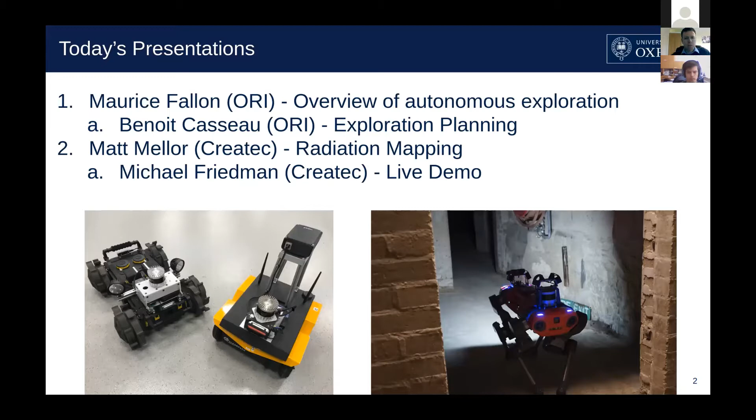So we've worked with multiple platforms in the project. Most of the work was done with a legged system on the right-hand side, the ANYmal, but we'll demonstrate with the Jackal in the center/left, the yellow robot. Okay, so first I'll talk about it from the context of autonomous exploration entirely without reference to nuclear radiation. And from my perspective, the state of the art is the DARPA Subterranean Challenge.

So this is a multi-year kind of robotic treasure hunt in which a variety of teams around the world are competing to develop autonomous exploration systems to allow teams of robots to start with no prior information and explore unknown facilities. So that's been tested in multiple different test locations. So an underground mine. This is a mothballed nuclear facility in Washington State in the US, where the most recent competition was held in February of last year, just before everything changed.

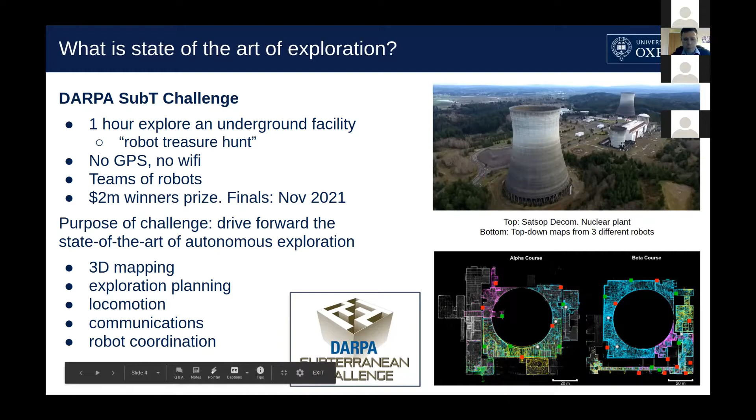And you can see in the bottom right some of the maps that were created by our team competing in the competition. Each color indicates a different robot that was exploring simultaneously over the course of 1 hour. The idea is that the robots start at this doorway here, teams of robots, and they have to build maps and report back different kinds of treasure that they detect. So mannequins or notable things like backpacks or mobile phones that might be detected through their Wi-Fi. And this is what the state of the art of mobile autonomous robots exploring in unknown environments looks like.

So the Spot robot here has been adapted by JPL, part of NASA, and we've been working with the ANYmal, and the characteristics of those and other platforms like wheeled platforms, which have been used by other teams, are having a variety of omnidirectional LiDAR and depth cameras around the robot. So you can see in both of the platforms here, there are a multitude of cameras and LiDARs that are creating 3D reconstructions all the way around the robot, supporting different types of odometry, so things like thermal cameras, because part of the challenge is in smoky environments.

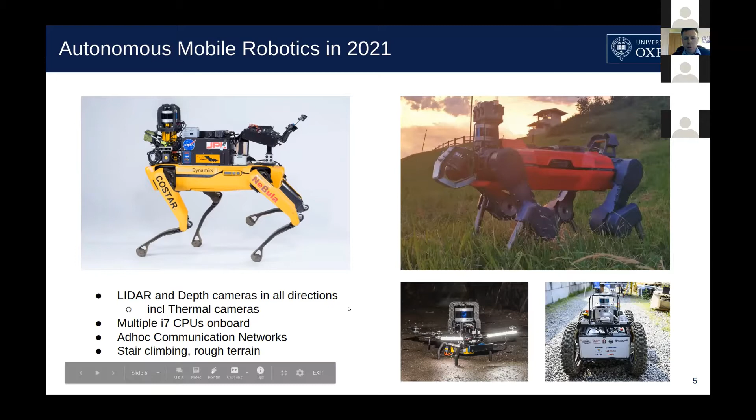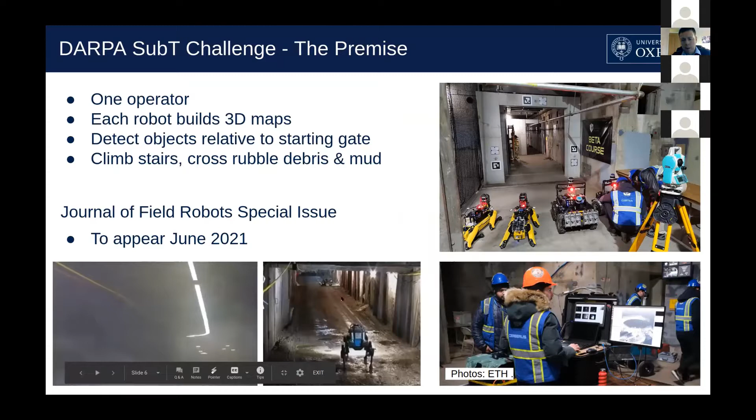And that's come about because, you know, with all of this extra kit that you can see on top of the robot, the Spot robot here, there are multiple i7 CPUs on board. So there's a lot of capability being pushed forward in this competition, and these are the scenarios that you can see. So smoky environments, muddy, dirty mines. Here in the front, you can see one of the robots from our team that went out first and fell over, and then the second one is following through. And it's all controlled by a single operator.

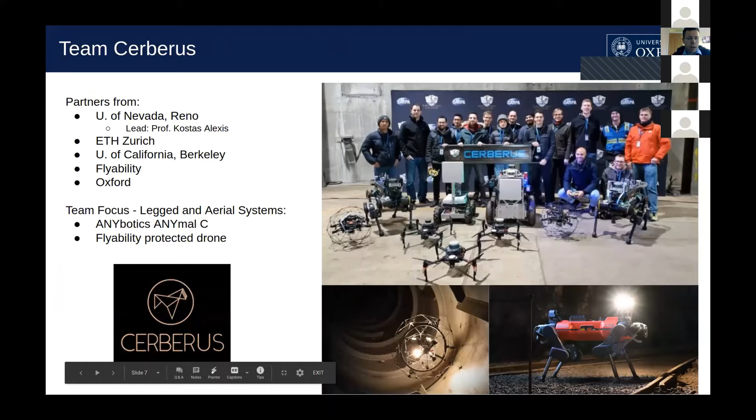Now, I won't go into great detail. This is the team that we're involved in, but we're focusing on a combination of aerial and legged systems. And some of the mobility aspects that are being pushed forward in here are obviously things like stair climbing, traversal of muddy ground, but also communications, which is a major aspect. The first time you go around a concrete wall, your communications drop out. So we're developing droppable wireless antennas so that we can extend communications into the facility so the operator can see what's going on and direct the robot.

Today I'll talk mostly about 3D mapping, which is the core technology to give the robot situational awareness and then to enable exploration planning.

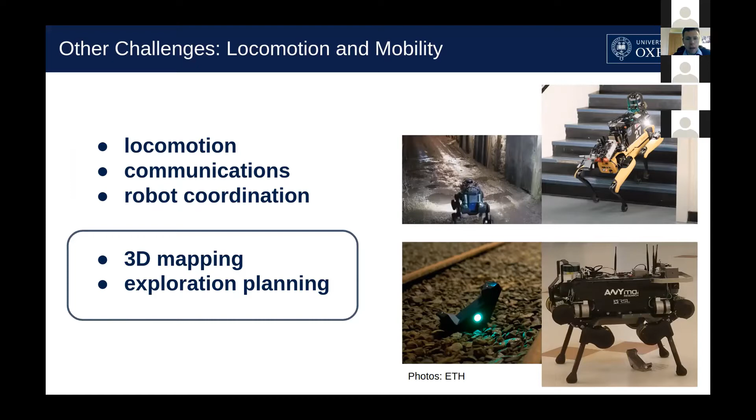As I mentioned, the robots have a variety of different odometry sources on board. So on top you can see here a series of fisheye cameras, so that they're able to give us a kind of visual odometry, laser obviously, and leg odometry. And the primary piece of work that we've done and contributed to this competition, but also developed and integrated for the project, the radiation project, has been fusing all of these different sources of odometry.

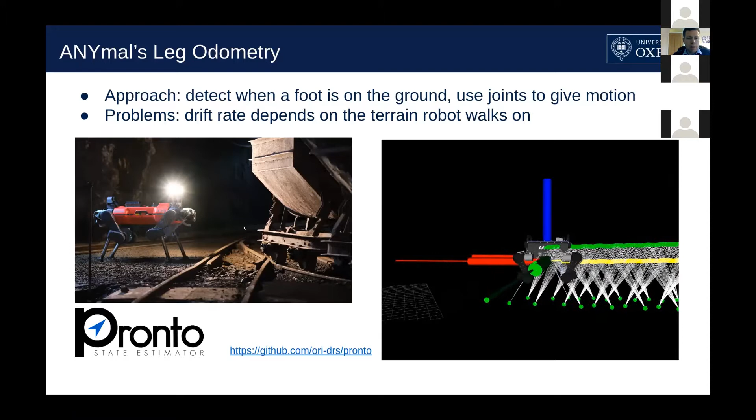And then we have the leg odometry from the walking robot. This on the right-hand side indicates the walking robot walking, and every time you see a new green dot, it corresponds to a foothold, and that gives us a constraint that allows us to estimate just based off of the onboard leg sensing. And with wheeled robots, you would have wheel odometry. This source of odometry continuously drifts, and really it depends on the type of terrain you're working on. So on the left-hand side, you can see some muddy ground in an old mine that we've used for testing.

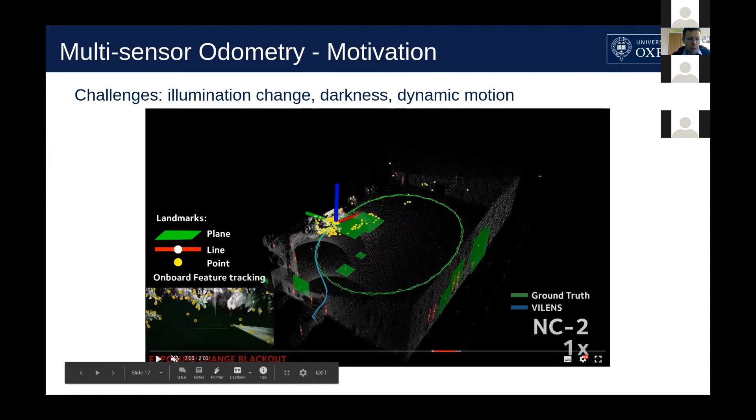So here you can see it's a very harsh visual lighting situation. We're pointing the camera directly towards the sun, and as we come underneath this bush, you can see that the exposure in the camera changes dramatically. The yellow dots, which are the visual features that are being tracked, drop out. You can see the cameras, oh, am I getting that right? The camera becomes completely overexposed.

All the yellow dots have dropped out now, but we naturally fall back to tracking the LiDAR planes and patches that you can see here. So here you see a green patch on one of the walls, and then you see some vertical edges which correspond to edges on window frames and door jambs, for example.

And that gives us robustness to a lot of dynamic motion if the video is coming through. And here you can see some sort of more aggressive motion. So this is our handheld system being aggressively shaken, and despite that, we're able to fuse all of the sensor measurements.

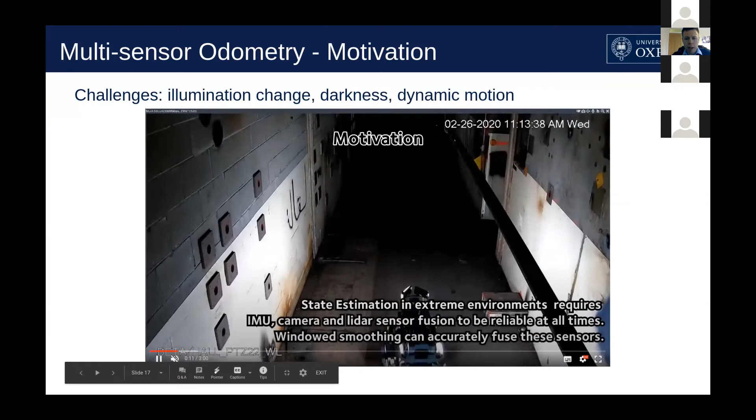And then taking it back to the application domain, this is the entirely unlit room where the only lighting is onboard lighting from the ANYmal robot, fusing together these different sources. And here you can see what that looks like. So the yellow dots, again, are the visual features that you can see both in the image and in 3D space.

The green patches correspond to flat patches. It's actually flat patches on the side of the cooling tower of the test location, and the red edges correspond to vertical structure that you see in the environment. And you can see the very consistent odometry that's being estimated.

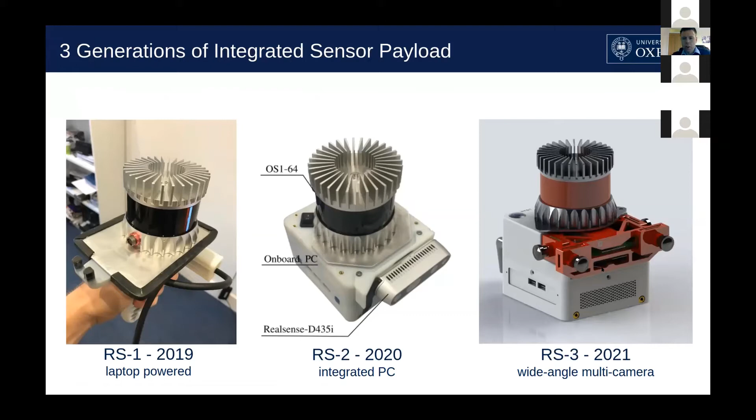So we've been developing this through 3 different iterations, making it more advanced as we've gone from something pretty crude on the left-hand side. We integrated a PC early in the year, and then we have this new model that we're putting together that has multiple wide-angle fisheye cameras, so that we can use more vision in some of the degenerate scenarios. And we've also worked on deploying it and integrating it within robots, which will be the focus for the remainder of the talk.

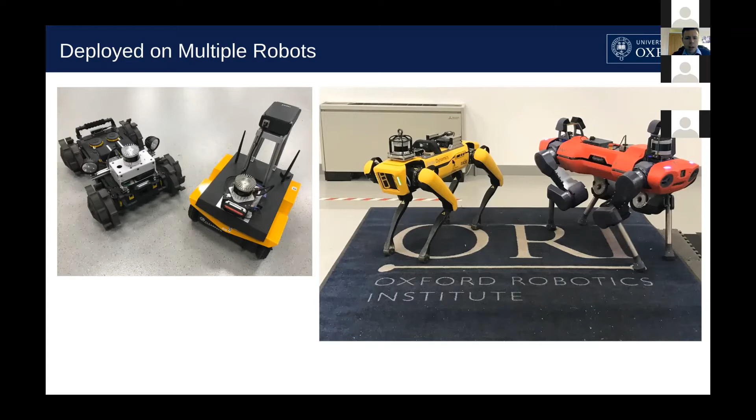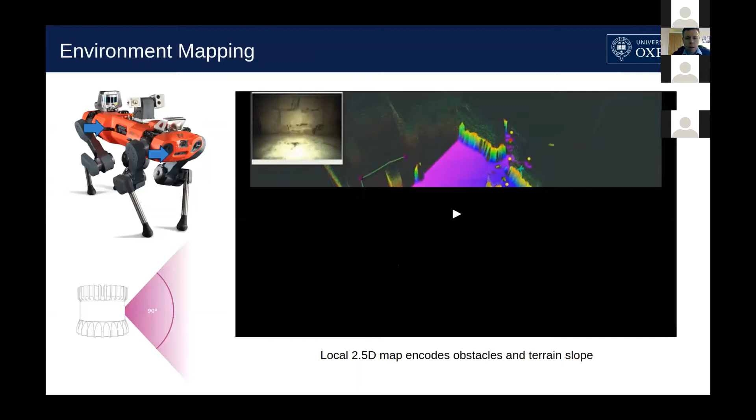So this modular navigation system you can see has been deployed on multiple robots, including this Spot robot that we've had on loan recently. So the last thing I'll say before handing over to my colleague Benoit is that what I've talked about so far is a local mapping system that works in 3D in difficult lighting conditions. As you can see, our entirely dark test facility that we have used is about an hour from Oxford.

Here is the local representation that we're able to build when we've fused all of these different sources together. So we've got a terrain map that effectively summarizes the local obstacles that are in the vicinity of the robot, and Benoit will talk about how we make decisions to move in that space. But you can see this is a kind of 2.5D representation. It's kind of a carpet or mat around the robot, where red is high and blue effectively is flat or lower, and those are the spaces where the robot will plan.

That's enabled by, for example, depth cameras pointing in all directions on the robot, as I've indicated on the left-hand side here, but also some of the more modern wide-angle lidars have a much larger field of view, so you can actually use those as a single sensor by themselves. So at this stage, I'm gonna hand over to my colleague Benoit Casseau.

Benoit, can you hear me? Yes, I can hear you. Do you want to take the screen? Okay, I can see that.

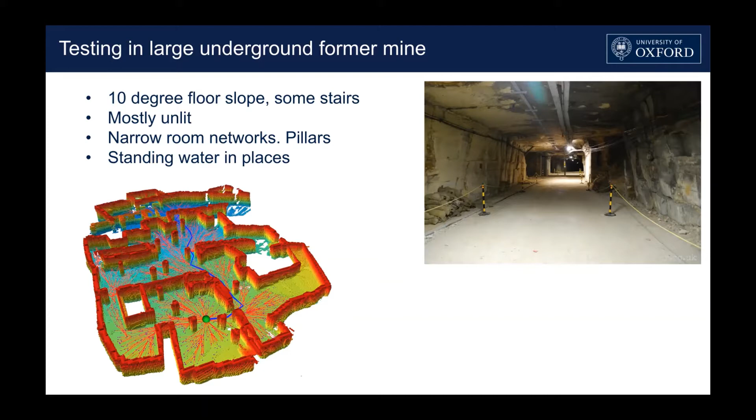So now I will show you the two robots that we brought to this place. So Maurice already talked about the ANYmal C. So it's a legged robot. It's a 45-kilogram legged robot. So it has one LiDAR on the top that we use to build our SLAM map. It also has 4 depth cameras, 2 on the sides, 1 on the front and 1 on the back.

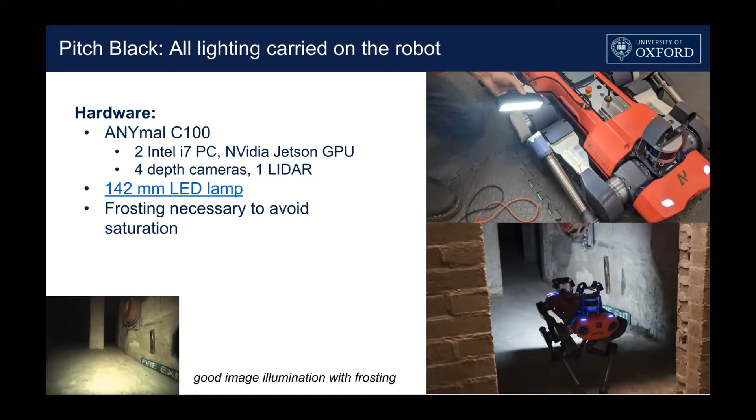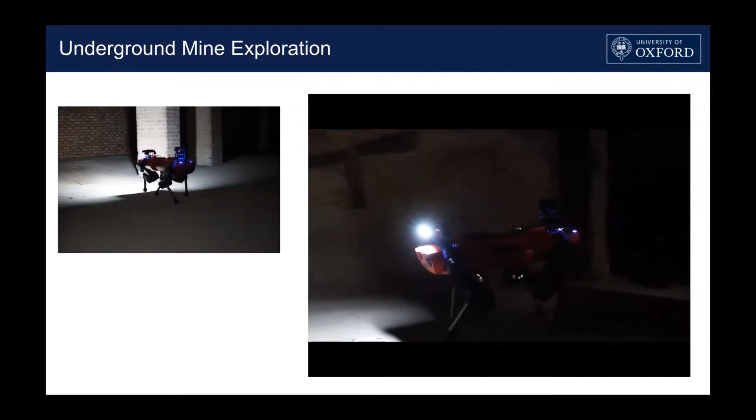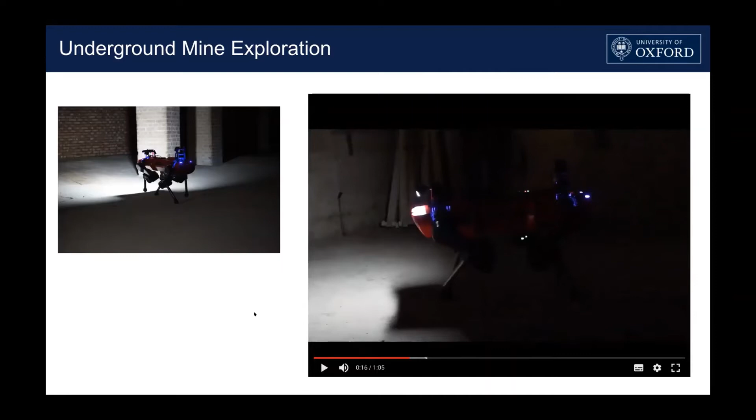So I will show you a video of ANYmal C exploring the room. Right. It was to give you an idea of how ANYmal C can move.

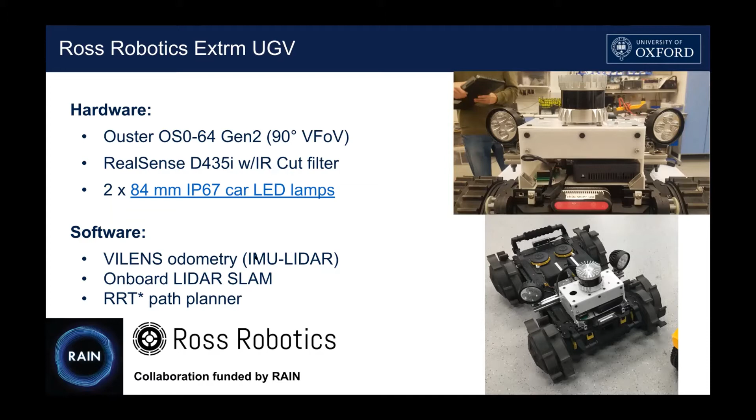So again, I will show you a quick video of the Xtreme robot exploring a room in Corsham. Sorry.

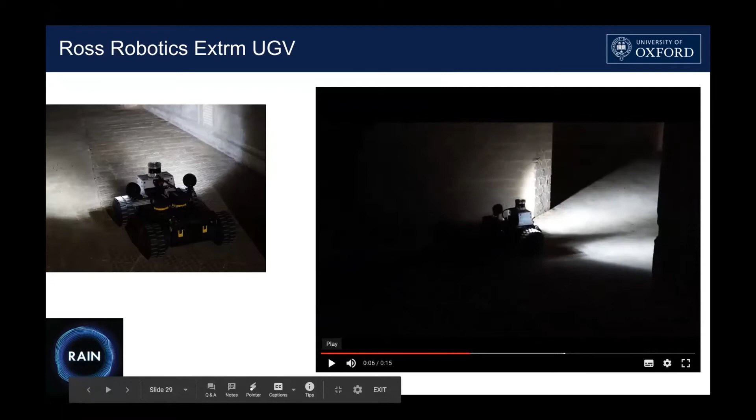Right. So this is the Xtreme robot exploring a room in Corsham. So the frontiers are in yellow. The goal is the red ball. And we are using RRT to reach the goals. So you can see the trajectory of the robot in green. It's the green path. So it's computed by our SLAM system.

Here you can see that we are using the SLAM graph as a highway to quickly reach a node of the graph, and then to quickly reach a stored frontier. And you see that every time a frontier is reached, a new frontier search is launched. And yes, the exploration goes on like that.

So our 2 robots, ANYmal C and Extreme, were able to explore most of the rooms in Corsham. So Corsham is the name of the underground mine. Yeah. So I will now move on.

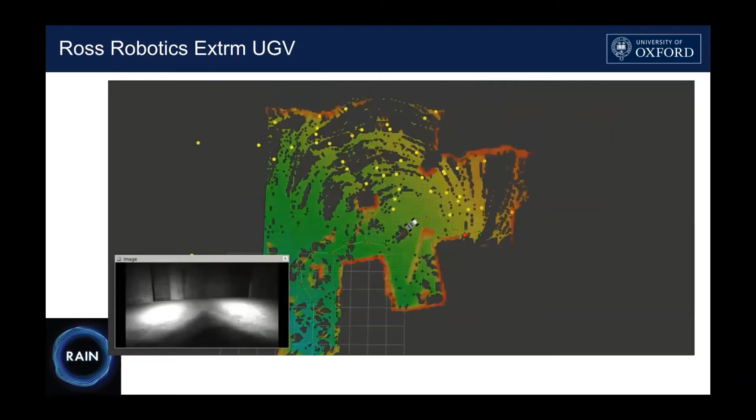Benoit, I think your presentation might have frozen. What is frozen, sorry? I think your presentation is still on the Corsham experiments. Is it still the case? Yeah. If you stop sharing and reshare. Yeah. Is it better now? It's a blank screen at the moment. So I'm sharing my screen again. No, it's a blank. Sorry. I can see if I can share mine and play the slides. Let me take over on the screen. Okay, can you see the screen? Yes, I can see it. Why don't you continue? Yes.

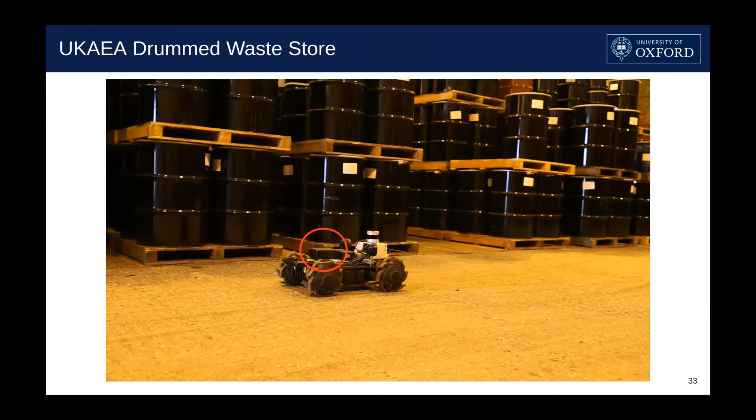Yes. So I would like to quickly mention some other features of the planner. So every time the communication between the base station and the robot is lost, the planner can tell the robot to go back to a node where the communication with the base was possible. Every time when the exploration is over, the planner can also tell the robot to go back to the home position.

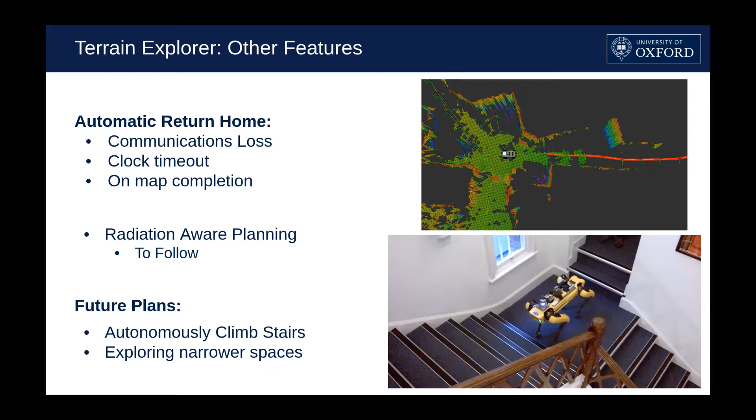Now I would like to talk about the future plan. So far we have only tested our planner on a single level facility, and we would like to extend that to multiple floors facilities. And we would like also to be able to autonomously climb stairs. So sorry, can you go to the next slide, please? Yes.

So during the last 2 months, RACE loaned us the Spot robot, and we used it to extend our SLAM system to multiple floors. So you can see it running on the right. So the robot started in the basement in our lab and is now climbing a staircase. It's not exploring, it was teleoperated, but it's now walking on the top floor. And you can see our SLAM system running live and mapping a multiple floor building.

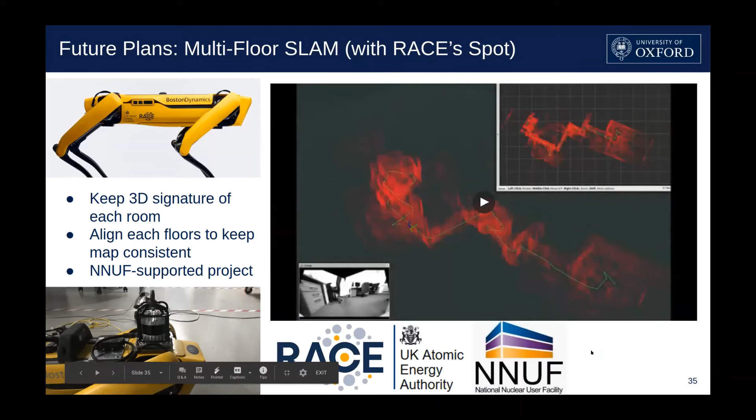And so we would like to extend our planner to be able to explore multiple floor buildings. Yes, that's it for me. Do you have any questions?

Okay, we're gonna stop at this point, and if anybody on the call wants to ask some questions about the planning and exploration part before we switch over to the radiation point, feel free to ask them in the chat. Okay, so Laura says might not have time for questions after Oxford talks are running over time. Okay, I thought we were on time, but yeah, okay. At which point we'll leave questions until the very end. Matt, do you want to step in now? Yeah, can you hear me? Yeah. Okay, great. I'll just share my screen. Can you see that? Yeah, I can.

Great. Okay. So hi everyone, I'm Matt Mellor, CEO of Createc. Createc does quite a lot of research into applications of robotics and sensing in the field of nuclear. Also going to be supported on this presentation by my colleague Michael Friedman, who's going to actually run the demo for you when I've finished talking. Can I advance? Oh, good. I thought I had Benoit's problem for a moment there.

The specific application that we're interested in with this project is autonomous radiation mapping. It's an area that's been developing and starting to gain increasing traction over the last few years. Createc's done a few projects such as the RISER project, where working in conjunction with a company called Blue Bear, we developed and flew an autonomous radiation mapping drone at Chernobyl for a few months. We have a handheld SLAM product that tries to sort of automate the data management for a human surveyor. And we've done various things with wheeled robot systems, as have numerous other groups around the world.

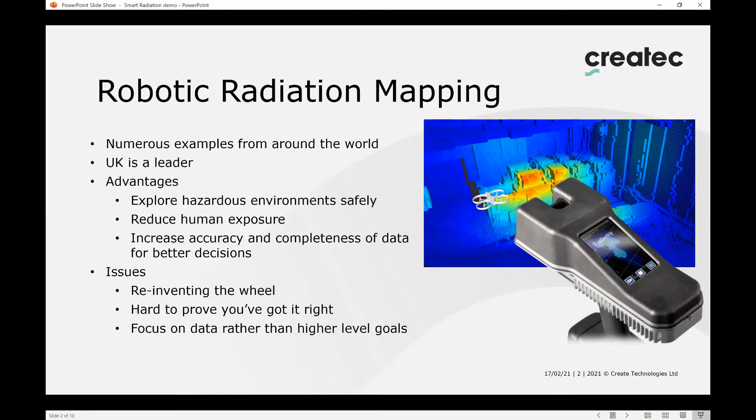So what we've tried to do in this specific project is to make a reusable subsystem that is packaged, a detector with some autonomy that converts the very specific data and the subjective data that comes out of that specific detector into something which is objective and sufficiently abstract that a robot can deal with it without needing to know precisely how that specific sensor was used to produce that specific result.

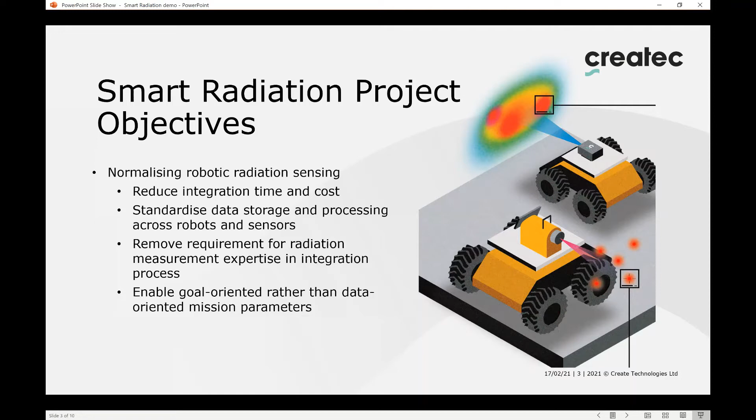What that means is that someone who doesn't necessarily understand how radiation measurement works can still take this system and integrate it with their robot to get some specific task complete, and they can be sure, and their end user can be sure, that the computations behind that are robust and that the robot is achieving its specific quality objective, rather than simply going and getting some data which may or may not turn out to be sufficient when we analyze it.

The structure that we've adopted assumes that the smart radiation module is developed by a team who really know nothing about the robot, and that the robot system is being integrated by a team who really know nothing about radiation measurement, which, if we're going to scale this up as an industry, is probably how it's going to work in reality.

And we also recognize that in order to interpret radiation data, you need to know things about the environment. And typically the robot already knows those things. So it already knows something about where the floor is, where the walls are, where the objects are. It knows how it's moving. So those are precisely the things that we need to know to interpret the radiation data.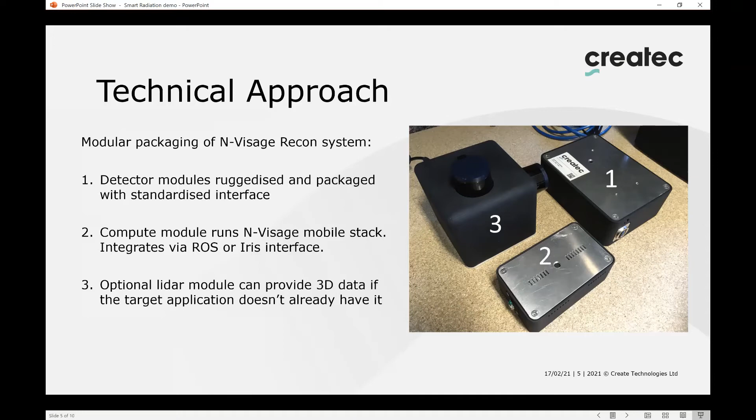Now, the main thing that this module is doing is it's converting the input data, which is typically a list of numbers that describe either average radiation intensities or observations of specific gamma photons. And it's combining that information with the location of the sensor at the time those observations were taken, and the perception of the shape of the world around it, and physics information to understand where did that radiation come from, what was the intensity of the source that it originated from, and physically where is that source in the environment.

One of the main things that we did in this project, as well as the repackaging and introducing the automation interface, was to drop one level down in the way that we were handling that data, so that we're now working on an individual photon basis. And that enables us to accommodate a new type of radiation sensor, which is what's called a Compton imager.

A Compton imager makes observations of the specific way that gamma radiation photons interact with the solid matter in the detector, such that they can infer that the photon must have originated on the surface of some kind of cone. Now that cone will be somewhat random for each observation that we make, but the true orientation will always lie somewhere within that cone. To be able to produce the radiation map, we just need to do some kind of statistical maths on that set of cones from many events to deduce the true location, or even to make a full image.

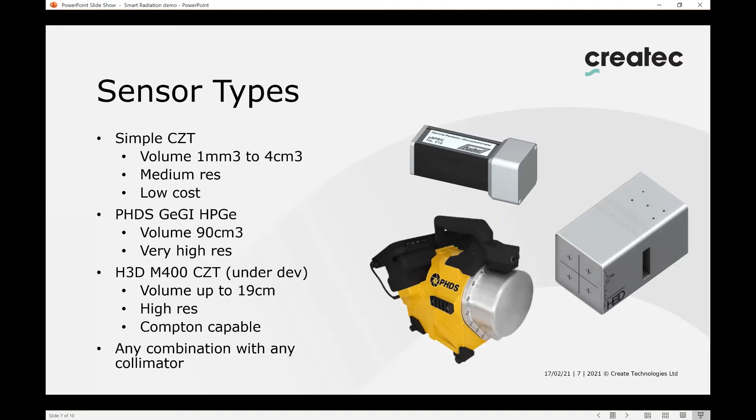So this video is an example of how this looks in practice. We've got up here a robot. You can see on the left is a ClearPath Husky. You can't quite see it at the moment, but on the far side of the yellow detector is the ORI Rooster payload that's been doing mapping using the VILens algorithm that Maurice described. And then that system is communicating with the smart radiation system, just sending periodic map update messages and a stream of location data. The smart radiation data system is integrating that with the individual photon observations from the yellow GeGI detector to work out what's going on in the environment.

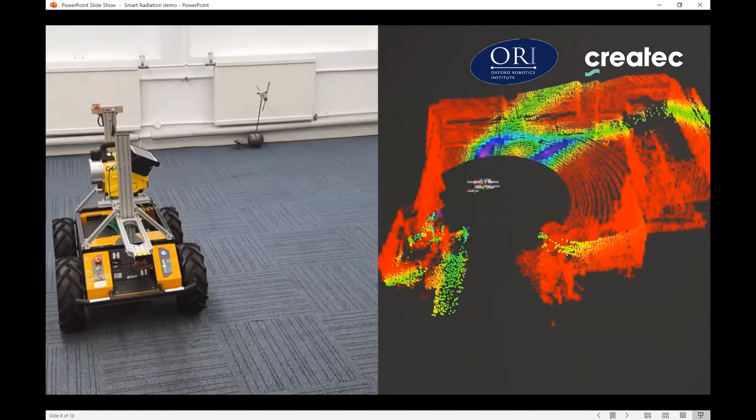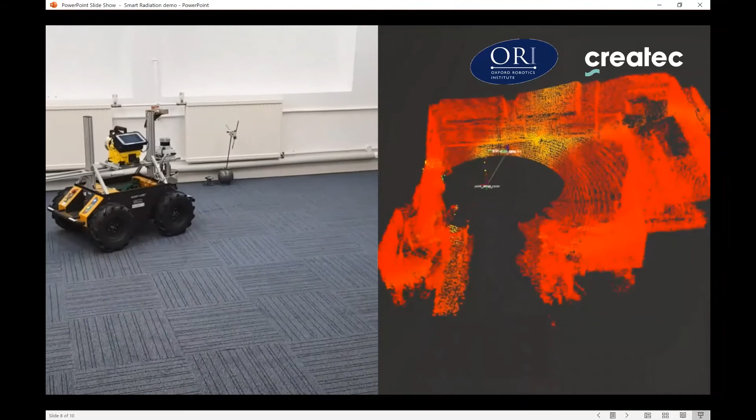And just in the center right of the image, you can see what looks like a lead ball with a retort stand sticking out of it, and that's holding a small radiation source. So this is a pretty small source, pretty difficult to see. As the system starts to move on the right, we get introspection into what's going on inside the smart radiation package. So that sends out a map update message every few seconds, and you can just about make out there's some sort of arcs and streaks. So each one of those corresponds to a single photon that's been observed. So we're seeing just a handful of photons here.

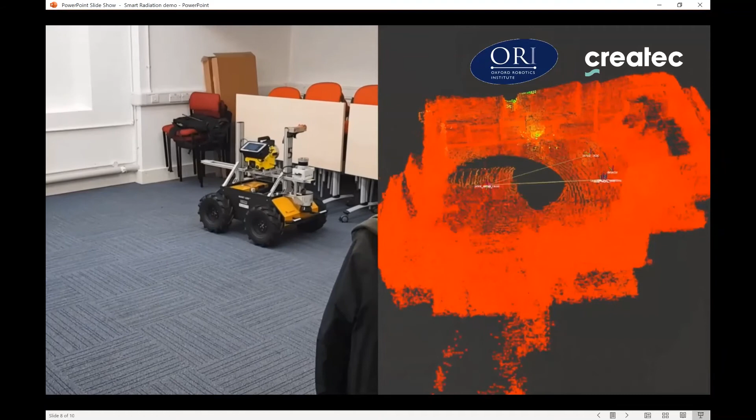The system's in continuous motion, so each photon is being seen from a different location, and yet we're autonomously able to fuse all of that data together and work out where that source is. So you can see that that green blob just turned purple actually as it's become more certain of it. That's starting to develop in the correct location for where that source is. Now this source is really tiny, so to be able to accurately pin that down to within a few centimeters, within a few tens of seconds from an instrument that's in constant motion, that's a really tough challenge.

And yet effectively what's happened here is that the ORI team are able to put this together without really knowing anything about radiation detection at all, just simply pick up the most sensitive detector, bolt it on, and the rest is almost completely automatic.

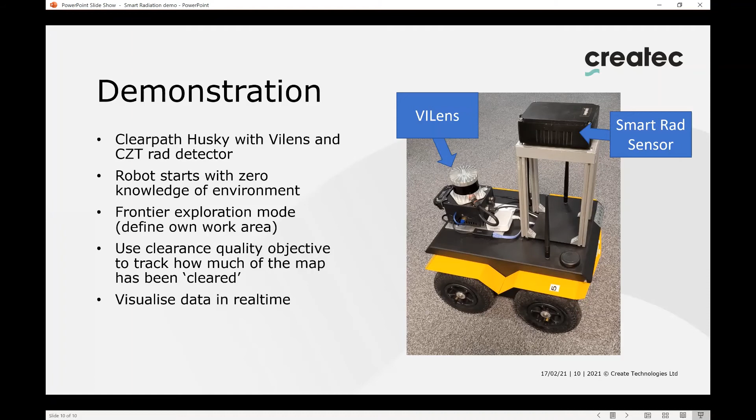So at that point, I'm going to hand over to Michael and Rachel if you're ready. Yeah. So can everyone hear me? Yeah, we can hear you. So hello, this is me on Rachel's feed.

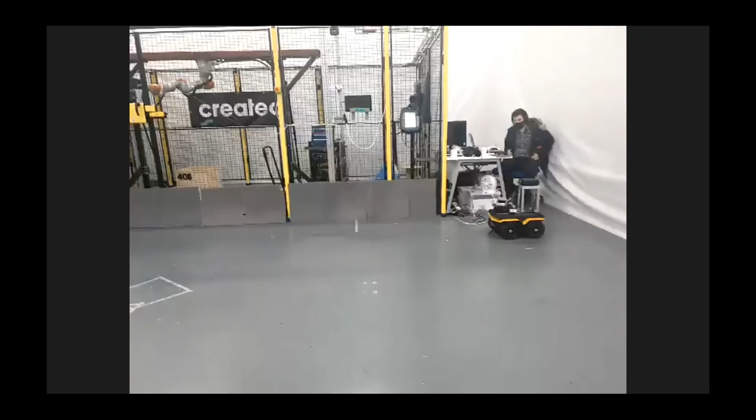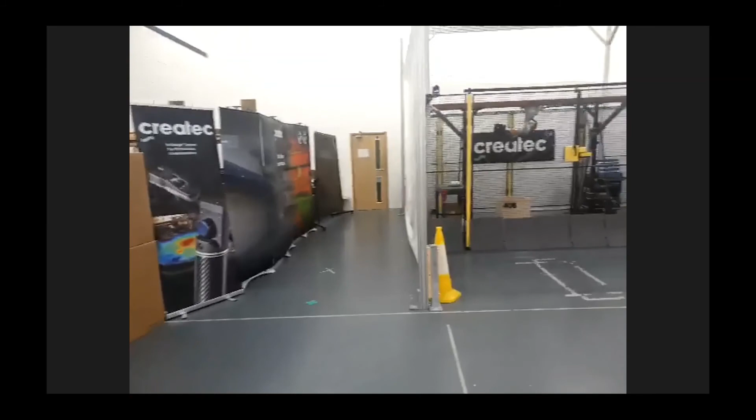So we're here in the Createc warehouse in Cockermouth. So if you'd like to show them the warehouse, it's not the most representative environment, but it is what we have with the pandemic. And I think Rachel is in the field of view of the camera, you're just off the left. Can you show them where the source is? So down this corridor, there's a cesium source. It's a pretty weak cesium source.

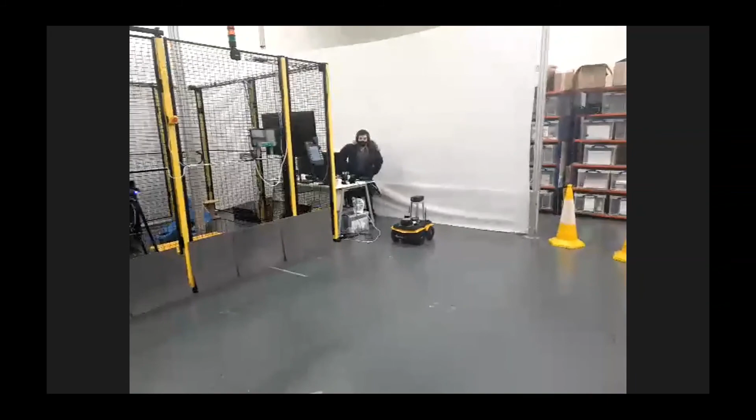So with the weak cesium source, which the Jackal can only really see when it's reasonably close to it, the only real way to reliably find it is a dense, very dense search. But because this is a live demo and a dense search could take quite a long time, we've opted for just a sort of general point cloud, a shorter version where it just optimizes for map quality. But while optimizing for map quality, you're guaranteed to go down the corridor at some stage. So it's pretty much guaranteed to find it.

What isn't necessarily guaranteed is to find it in any reasonable amount of time. So sometimes the run will take 2 minutes, sometimes the run will take 10 minutes or 15 minutes before it decides that it's satisfied, because it's not entirely deterministic. Slight changes in the point cloud map at the beginning could result in various different paths. So I'm going to let it run for a few minutes, and then if it hasn't found the source yet, we have a pre-prepared video to play.

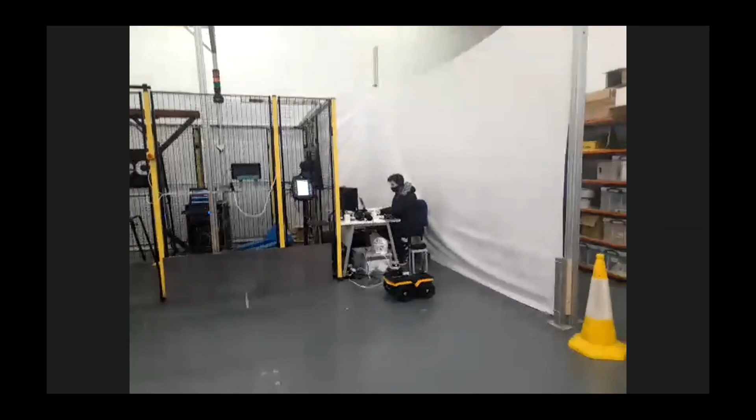Also, if you look off to the right, there is another area of the warehouse, but we've fenced it off with cones just so that the Jackal doesn't waste time exploring down there. So I think that I'm ready to start it off, if that's all right. So we'll kick it off, you can see the video of it exploring for a while, and then I'll share my screen and you can see the actual output of the planner and the radiation mapping.

So let me get it going. All right, so I'm going to set it off on its exploration now. All right, and now that you've seen it move around for a bit, I think I'll share my screen so that you can see what I'm seeing.